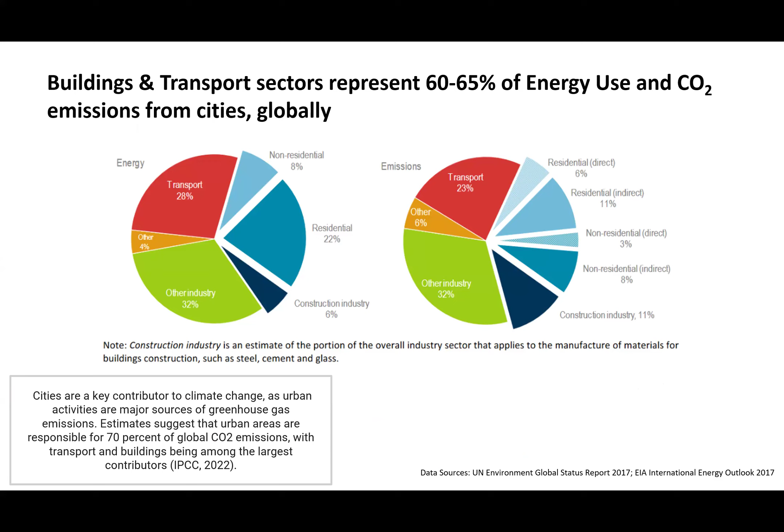So what I want to talk about today is mainly related to the buildings and transport sector, because those are the biggest energy and carbon emission consumers worldwide. It changes from city to city, but mostly it's about one third transport related, one third buildings, and the rest is more industrial use.

So if we talk about, still a bit of an echo, I think. Yes, so I think you can continue as usual. You probably need to switch your speakers off. Anyway, so if you look at roadmaps towards zero emission, away from the screen and speak like just the slides. Yeah, but I'm fine like this. I think it's more, I mean, we can't have two speakers. There's just an echo of the voice. Yeah, but if you switch in your audio settings, if you reduce your speaker to 0, then there won't be any echo.

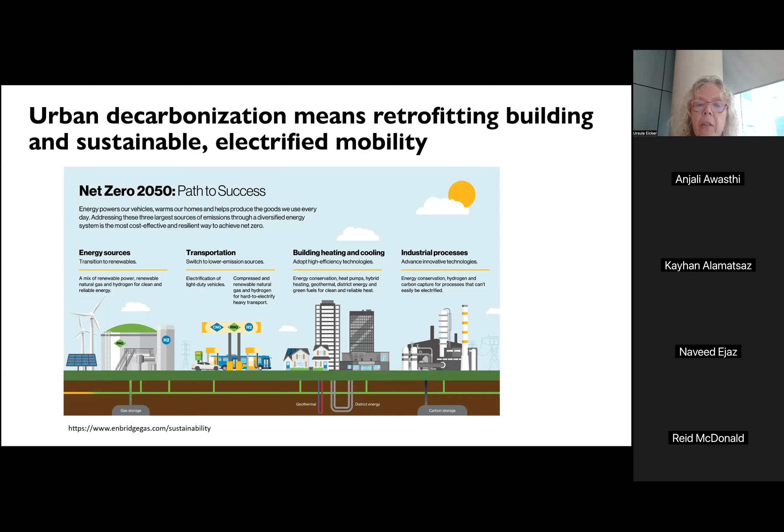Okay, so we need to look at renewables integration and then, of course, decarbonizing mobility and buildings. So I have quite a lot of slides, so I'll move quickly through some of them, but you can ask questions and come back to any of those.

Basically, if you look at buildings and transportation, in the building sector, if you talk about decarbonization, first of all you need to reduce the demand. That's always the best strategy, and then electrify. Electrifying buildings means mainly going from gas to heat pumps. This is an example on the left side.

By all these measures, and also changing lights, they managed to reduce the demand so much that the new chillers and heat pumps they put in were so much smaller that they saved a lot of money on equipment size, since they needed to replace the chillers anyway. So in the end, the project was financially viable and even positive. It can be done even on really historic old buildings.

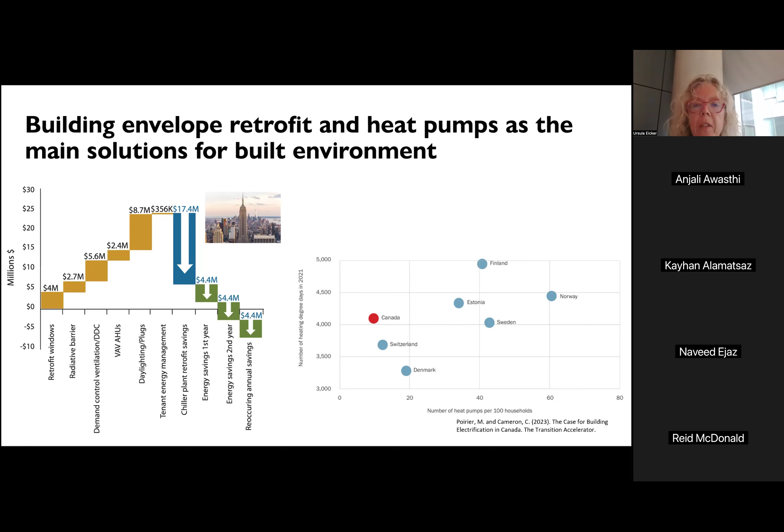Okay, so in transport, what we are working on is mainly the urban planning side - how do you make cities more walkable, more compact, with more amenities. This is the typical 15-minute city concept you might have heard about, very popular in Paris. So that's one side, not really technical.

It's again about reducing demand - I think that's one of the main messages. It's always a good idea to first bring down demand rather than just changing from gas cars to electric cars, which requires a lot of resources. So reduce demand, then increase active transit - bikes, walking, and so on. The only thing we work on in the mobility sector is then how to electrify more shared vehicles. I'll show you some results from a charging station location planning tool for electric buses.

And of course, there are car sharing models, and we looked also at bike sharing. I'll come back to that later.

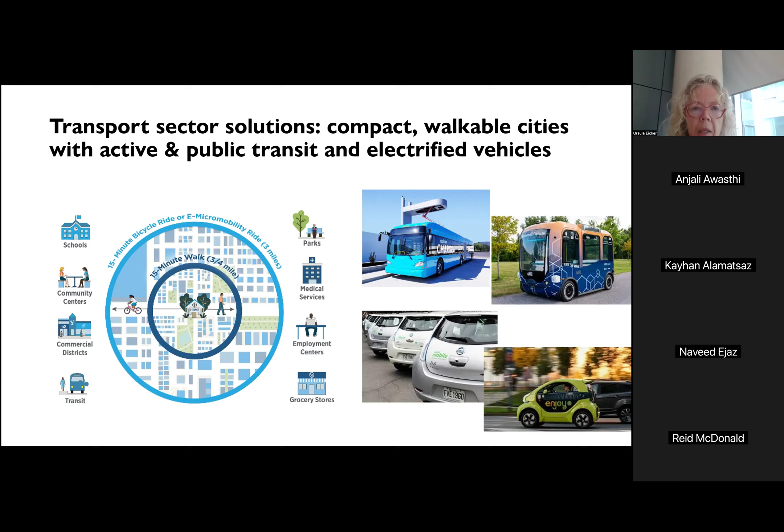So my team is basically trying to build these urban digital models to see how we can get to zero emission scenarios. One thing is to model the scenarios, the other is how do you get people excited about it and wanting to change something. So we have these web interfaces - I'll show you some examples of this.

We built a full model of Montreal. But we also have people working on game engines, basically importing the same kind of data into a game engine where you can have much more interactive scenarios, have people change things and see how they like the space, or have them leave comments and give feedback - for example, on a project here with ARTM on designing a new mobility hub in the Bonaventure area.

So that's basically what we try to do. And if you try to model an entire city, it's pretty complicated because you have a lot of domains - transport and buildings, but also livability, greenery, water management, food supply, and so on. So we try to connect all these different domains and have some calculation engines in the middle, and the results of these engines deliver output to web interfaces, gaming engines, apps, and so on.

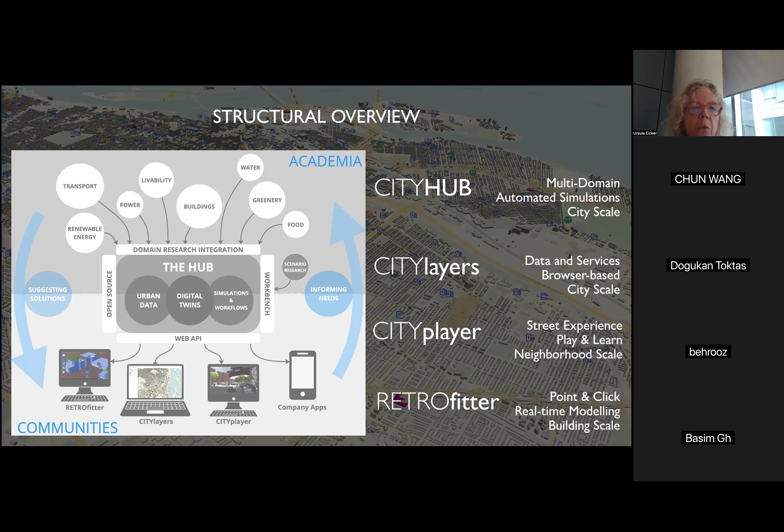I think the main thing is to really have a good software architecture so that many people, students, researchers, can add to it. That's one of my suggestions for you too. I know quite a few of you are working on transportation - if you have interesting models, it's a real pity that everybody develops super nice models but then you leave and it's lost. So we have a few software engineers who try to integrate different tools, mainly from grad students, so we can expand more and more the functionalities. For that to work, you need a really good structure for managing your data.

So we basically said, okay, we want to run simulations - energy simulations, agent-based traffic simulations - and we know exactly what these simulation tools need. That data we structured nicely in a central data model, because you will never get the input data harmonized. Every city does it a different way - some have Excel files, some have databases.

There will never be a standard, so you need to have some importers, but what you can standardize is the central data model, because from there on, once we've got the data in, it's always going to be the same process - we feed the simulation models and manage the results. And I think that was the idea from the beginning.

So we built, that was actually a postdoc who started with that, a 3D city model of Montreal using only open data. And it's not just data visualization - this is actually an agent-based model for transportation. So the interface shows real data, but also modeling results.

He started to just collect whatever data is publicly available - there's a very nice tree inventory of all the public trees, no backyard trees, but public trees are all in there. So you can make use of all this data in different layers - that's why we call it city layers - to then develop services. I'll show you a bit what I mean by services.

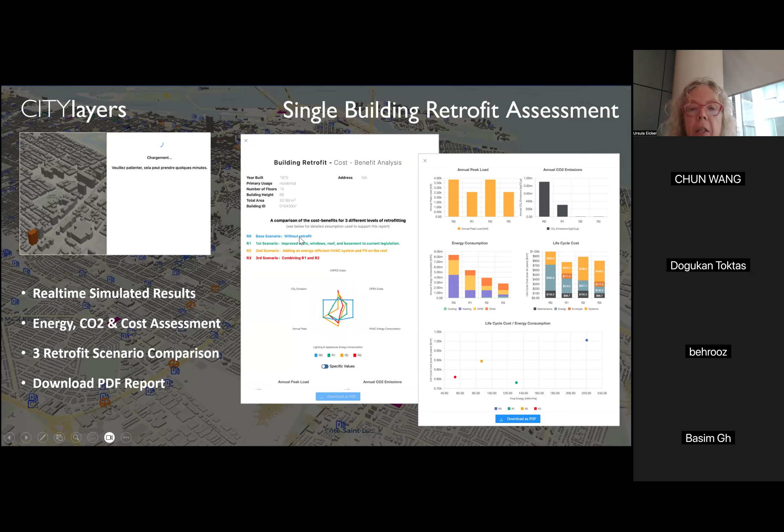Let me show you what that means. So you basically click on a building, and then you automatically get a sort of PDF that you can download on the retrofit scenarios of that building. So how much, what the base case is, based on usage and year of construction, what would happen if you insulate the envelope—walls, windows, roofs—what would happen if you swap the energy system from gas to electric heat pumps and some photovoltaics, and the combination. So that's what you get.

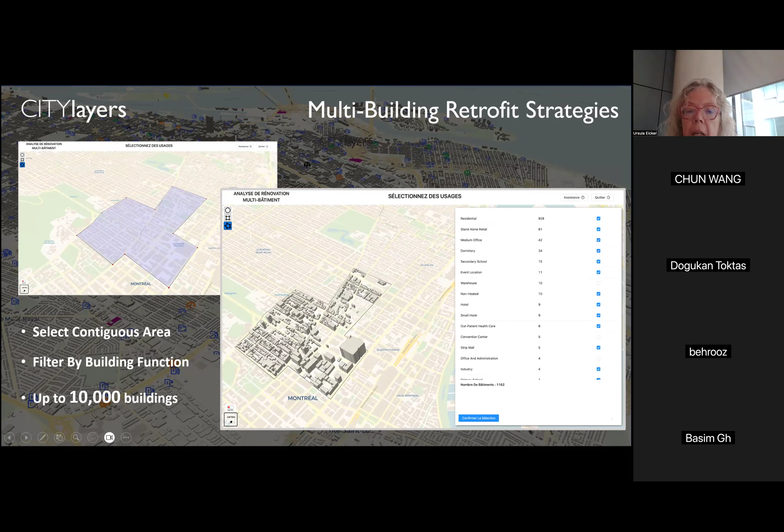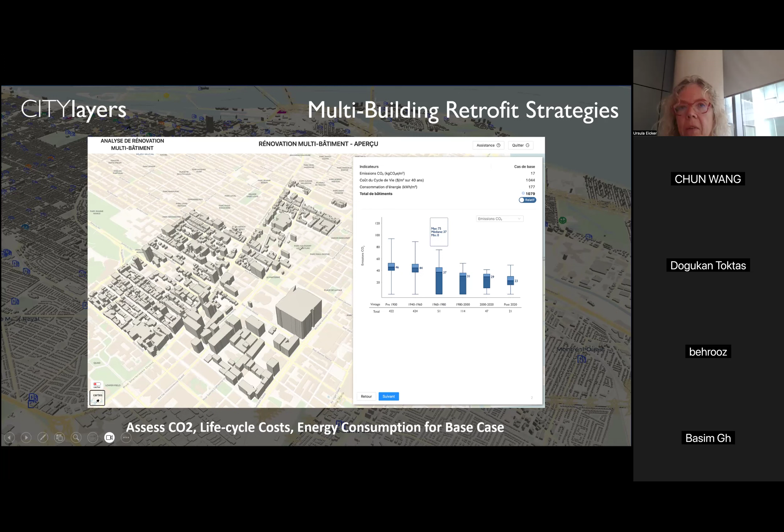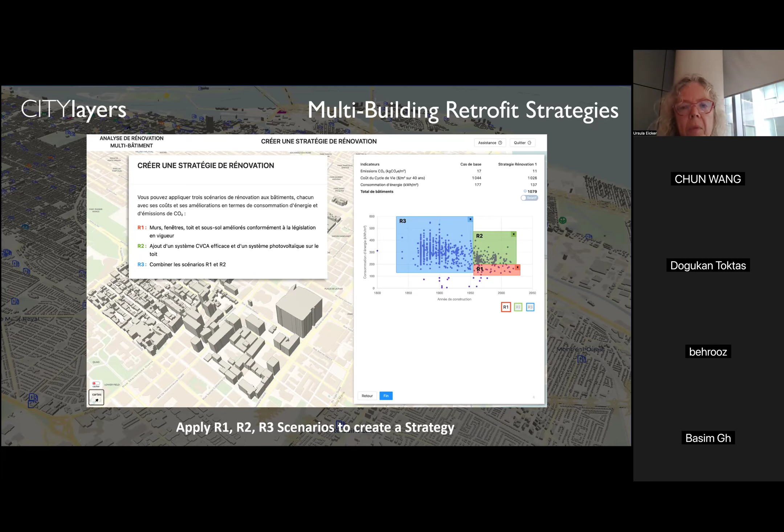So that is actually, and then we said, okay, now we can again do some retrofit scenarios, and the individual points are now individual buildings. And then you can say maybe for the oldest building I do the envelope, for the newer ones maybe change the energy system, or both—up to you. So these interfaces allow you to come up with scenarios, and then calculate, of course, cost—life cycle cost.

The status quo—the good news is even if you do everything, you retrofit the envelope, you put a new heat pump system, you put some solar on the roof, the life cycle costs are lower for basically every building than what it is now.

I think one of the problems is that companies today especially don't really look at life cycle costs. They want return on investment in a few years. They say, well, over 40 years it pays back—no. So there's a lot of convincing to be done to change mentality more towards life cycle costing, because then it's worthwhile.

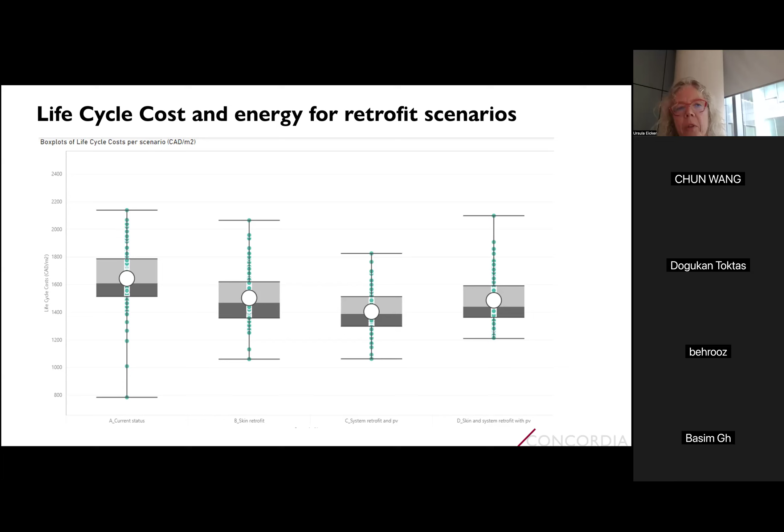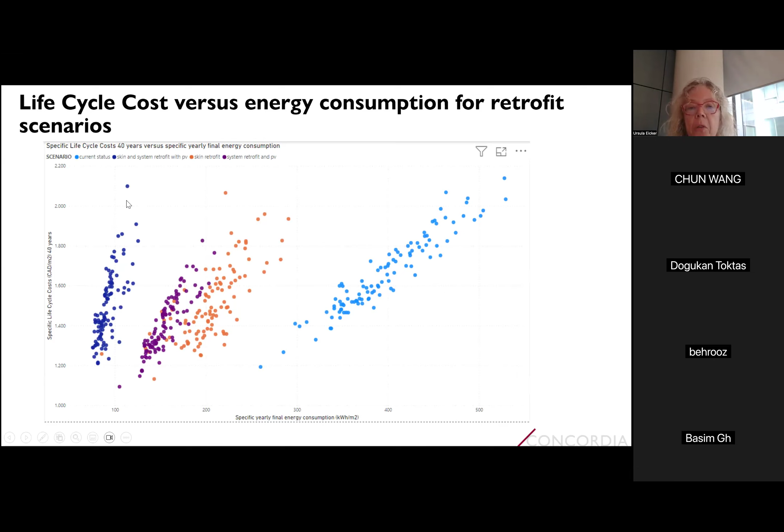So here you see again the status quo, all the buildings with their high energy consumption, and then you do these retrofit scenarios and you bring down the energy consumption, but also the costs are for most buildings lower than before. So that's what we can do now.

Just a few words on what that means if you want to create a city model, because now we started with Montreal, but now we've got a project with Quebec City—they want the same data. It's pretty useful for city planners; they all have sort of climate action plans, but so far they've had basically no way of calculating in detail how to do this. And so one of the main problems is the data.

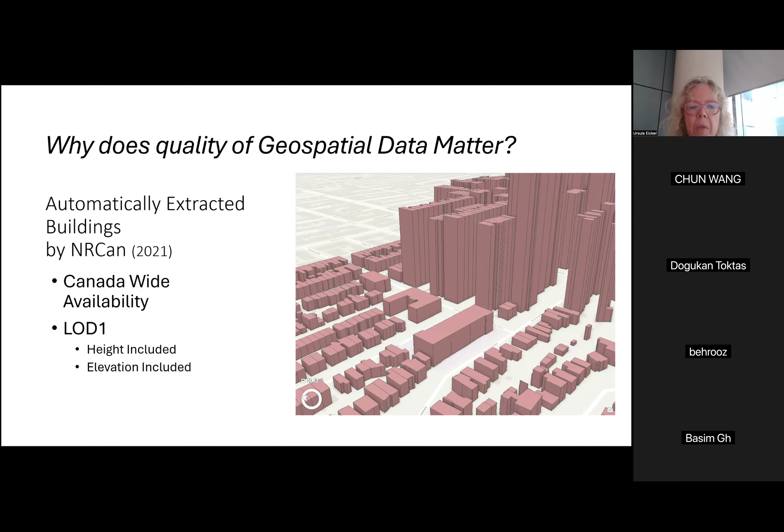NRCan, Natural Resources Canada, does provide geometry data for all cities in Canada, but you really need to spend some time looking at the data, because here in Montreal we found some areas for some reason had these incredible high building heights, which were of course wrong. So there's a lot of data cleaning involved, and we have some people now trying to automate these processes, because the data is basically derived from LiDAR flights—you fly over the city, you measure the height, but then basically the LiDAR is just a point cloud.

So this here is considered like one single building, but of course it's a street, it's for sure multiple buildings. So you need to overlay that information with, for example, cadastre information or tax office data, where you see what are actually the individual buildings. So you cut it up in pieces, then you go back to the LiDAR data set and assign one height to every building. And you see it's, of course, a big difference. And the results for your energy models will be, of course, also very different.

We import this data. We generate these IDF, which is basically the file type for EnergyPlus, an energy simulation tool, open source tool developed in the US by the Department of Energy. And then we need to bring in all this information about the occupancy of buildings, constructions, and so on. And if we can, we had some projects on accessing other data sets like building permits, renovation permits. They're also very unstructured data, so there's a lot of work needed to harmonize that. Anyway, that's the whole workflow. We enrich the city with all these attributes, and then we run the energy simulation.

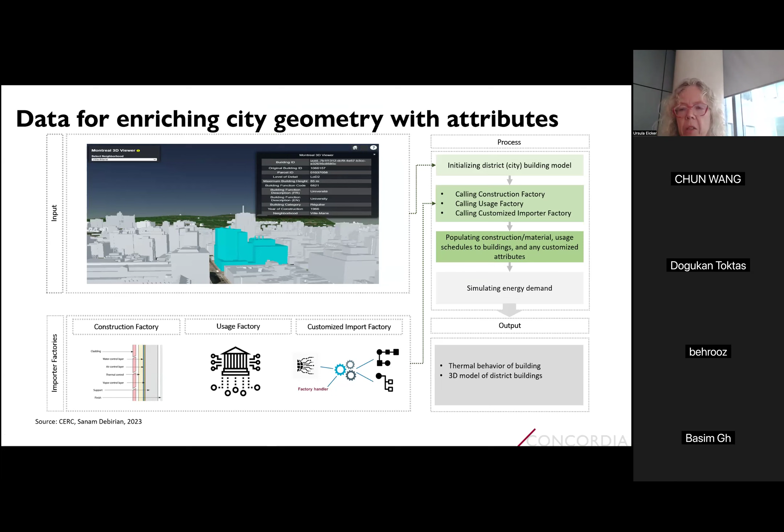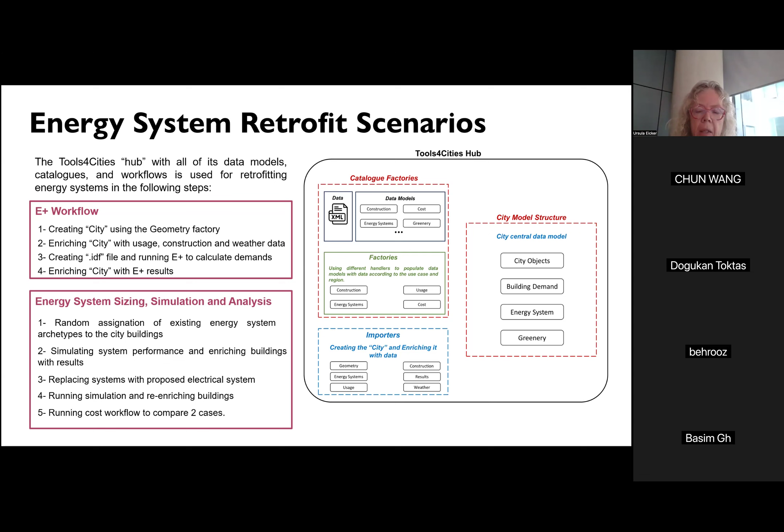So maybe to finish off the building part, once you have the envelope, you can calculate the demand, but you also don't know what is actually inside. There's no data set that tells you this building has a gas heating system. Of course, companies like Hydro-Québec or Énergir, they know, but they don't share the data. But we have statistics, and we know in a certain area of the city, 20%, for example, are gas heated. So what we did, we generated some energy models and then assigned to every building the heating system.

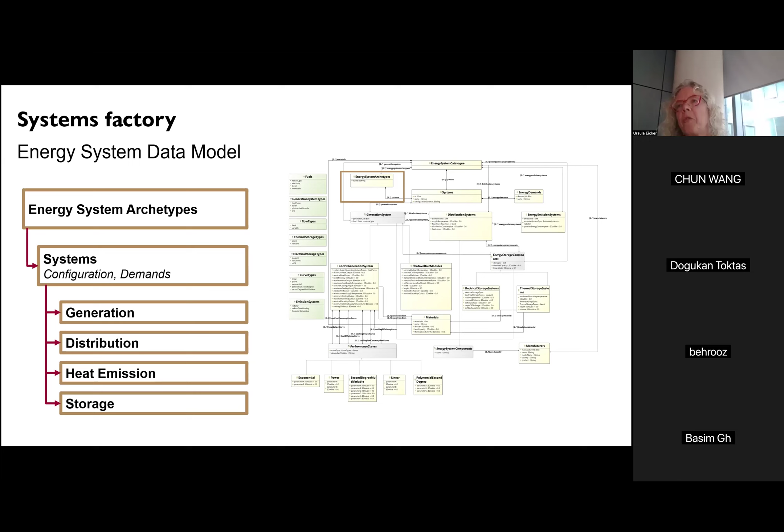And again, data modeling is pretty important because, as I said, once you know how to simulate anything, it could be a traffic flow or an energy system, you need to really structure the data well. For example, that an energy system consists of energy generation, you need to distribute it, you need to emit the heat in the building, maybe you have storage. So you really need to structure your data well. So this is basically our work to say what is a good classification of all these different components in an energy system. Then we bring in the data, feed the simulation model, and get the results. And I want to show you a bit.

So typically you could do that building by building, but there's a lot of talk now in Montreal on using district energy systems, because in a way it makes life easier if you have one central generation unit and you just distribute basically the heat, maybe also the cold. Maybe there's a new technology coming on, then you don't need to go back to every single owner, which is a pain. In every building, basically, you have just a heat exchanger, and that's it. Whatever happens in your energy generation can change. It doesn't affect the consumers.

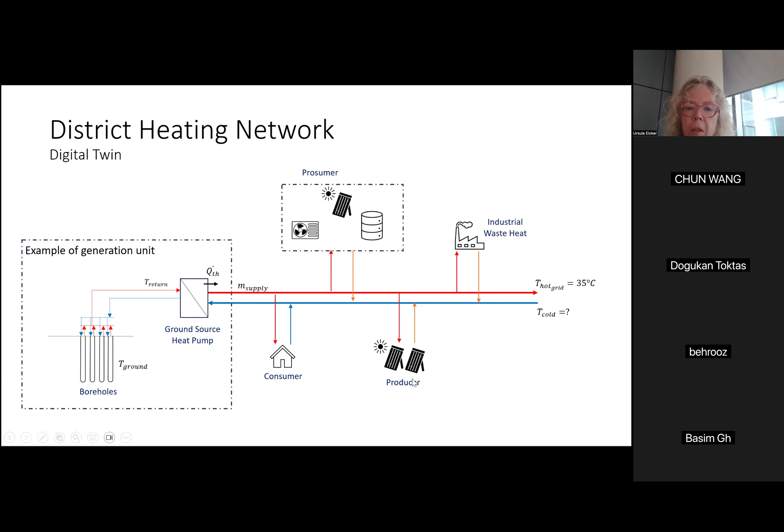So these networks are actually pretty interesting because you could also put some waste heat in. We have now a lot of data centers, lots of waste heat, and typically it just goes to the environment. Could be very nicely used to heat buildings. You could also put some solar or other energy sources into that district heating network. So we now spend some time saying, okay, how can we automatically generate models for district energy? So same thing, we know already what the energy demand is.

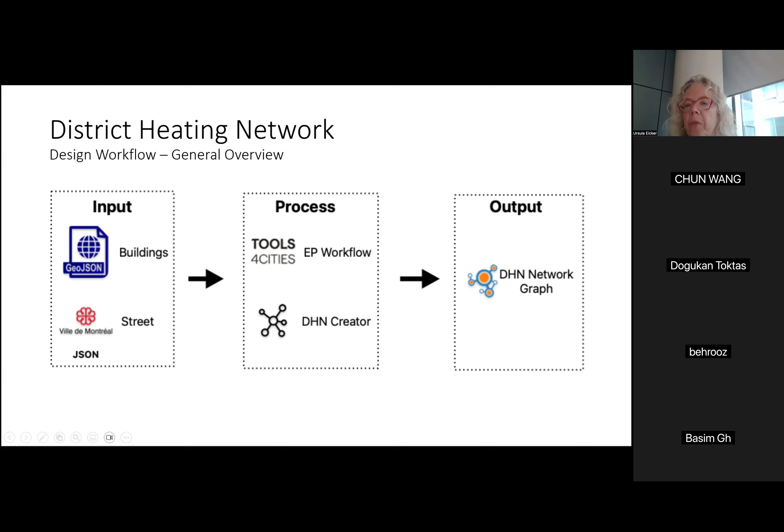Then we know the street layout. So any pipes, as you well know, because the streets are dug up all the time, any pipe will go through a street. So we know where the streets are going, and then based on the demand of the different buildings and the street layout, we could then automatically generate this graph, which is basically a district heating network. So maybe I don't go into all the details here, but it's an optimization problem. You need to find basically the shortest path to connect buildings through the street network to minimize cost, of course. Yeah.

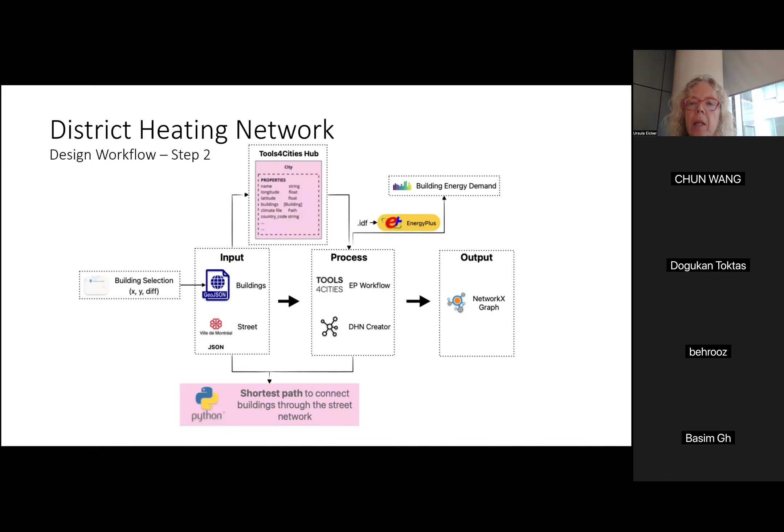So that's one thing. And the advantage is if you have lots of different buildings connected to one network, it's actually quite nice, because you might have heard that there's a lot of debate that Hydro-Quebec doesn't have enough peak power in winter. Because that's one of the main issues, that people heat their homes maybe at 6 o'clock in the morning, and then there's a huge peak and the network cannot carry it.

If you have a commercial building and residential buildings connected to a heat network, then this peak doesn't occur at the same time. So that makes it really much easier to generate this. So the district peak demand is typically much lower than the sum of all the individuals' demands. That's actually one big reason why district energy is interesting.

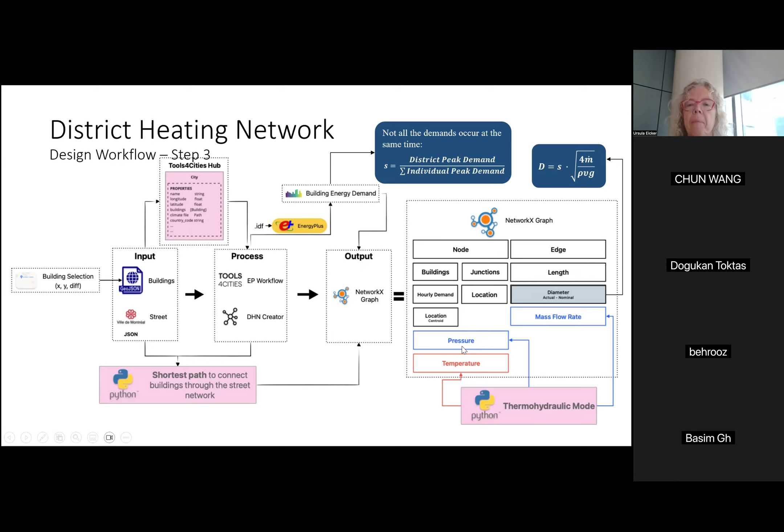And then, as I said, we try to minimize the piping lengths, and also the diameter, because you can imagine that the bigger the pipes, the more expensive. But on the other hand, you need to put all this heat through the pipes, so you need to minimize the pressure drop. So that's actually the optimization problem. So you need to construct the graph in the first place.

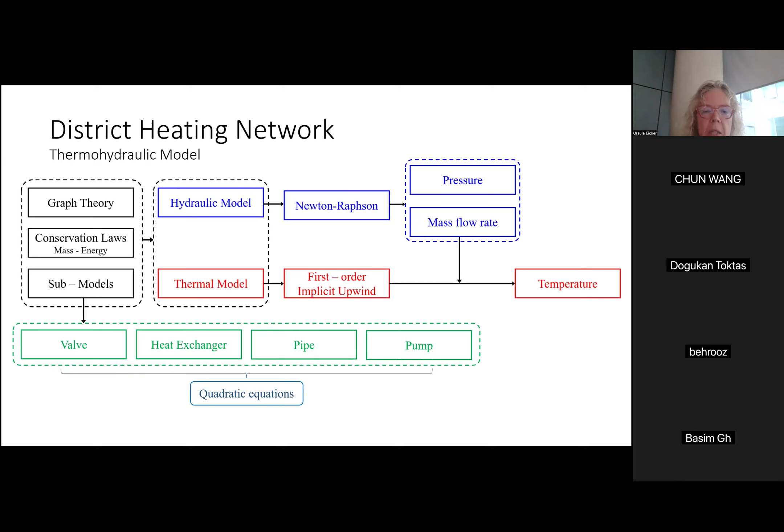Then you need to model the hydraulics. So there's basically water flowing through these pipes. And if you have water flowing through a pipe, you lose pressure, so you need pumping power. So the higher your pressure drop, the higher your pumping power. And you also want to minimize the heat losses, because if you have a central plant somewhere in the east of Montreal supplying buildings in the city center, you have already 20 kilometers of distance, you will lose heat. So that's a pretty complex use case.

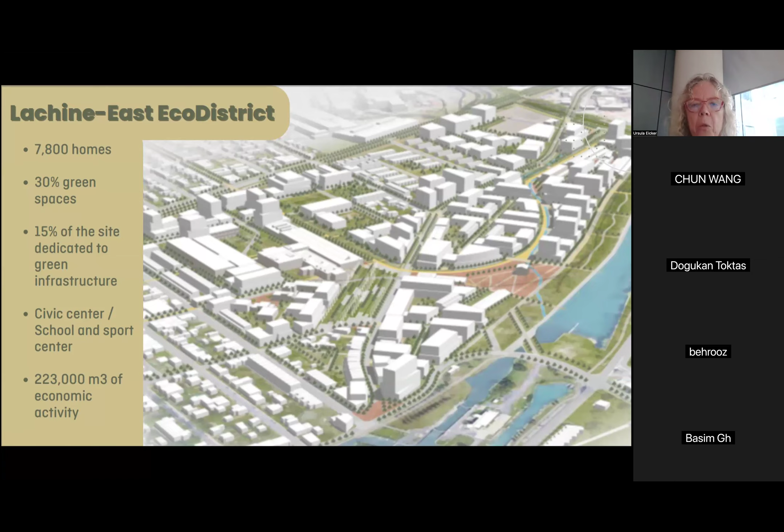And so one PhD student has developed these models, and now we're using them for district development here in Lachine East. You might know it. It's the end of the Lachine Canal, where the Lachine Canal goes into the St. Lawrence River. It's a big district to be built. Right now it's a brownfield, basically nothing left, a few old industrial buildings. And there are private promoters wanting to build on that area.

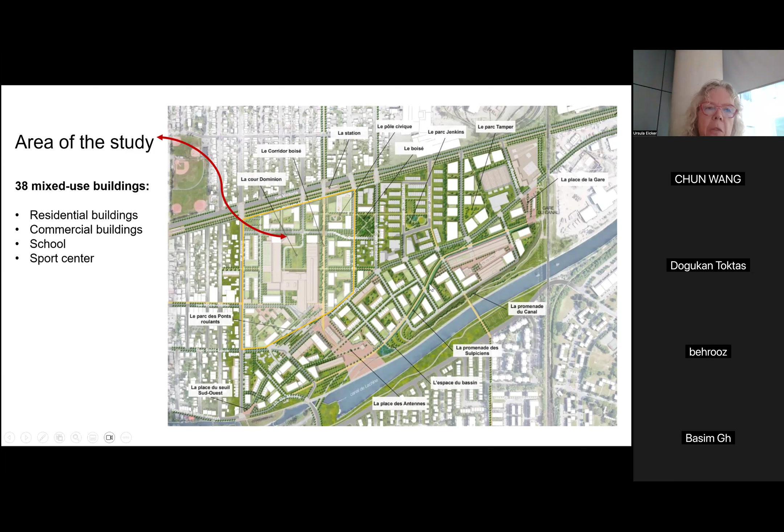But because nobody has experience here with district energy, they're all very afraid how much it will cost. For them, it's much easier just to put baseboard heaters. Cost nothing, and they don't care that it uses a lot of electricity. So basically what we're trying to do is we looked at the area, we have the urban master plan, and then we sort of calculate these energy scenarios.

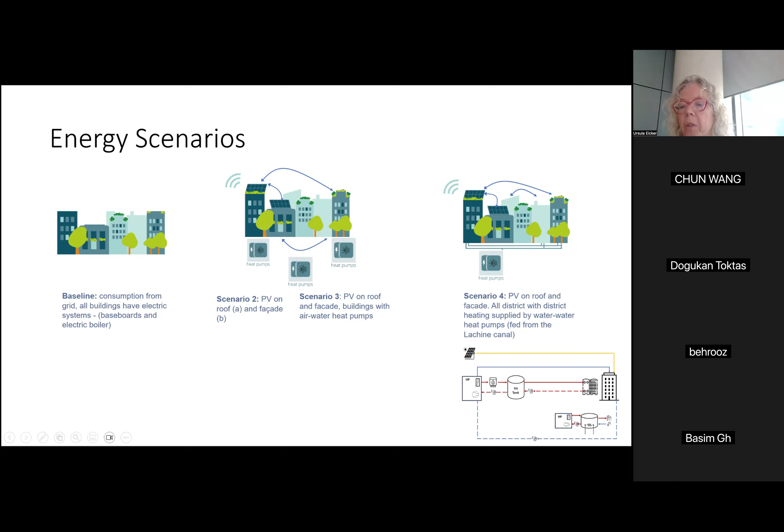Either this is the standard case, so everybody takes from the grid, everything is heated with electric boilers or baseboards, which is quite clearly a waste. And then we put some solar on the roofs, and then we modeled the entire district energy system for heating and for domestic hot water. So I'll just show you, and then I go to the transportation cases, because they might be of more interest.

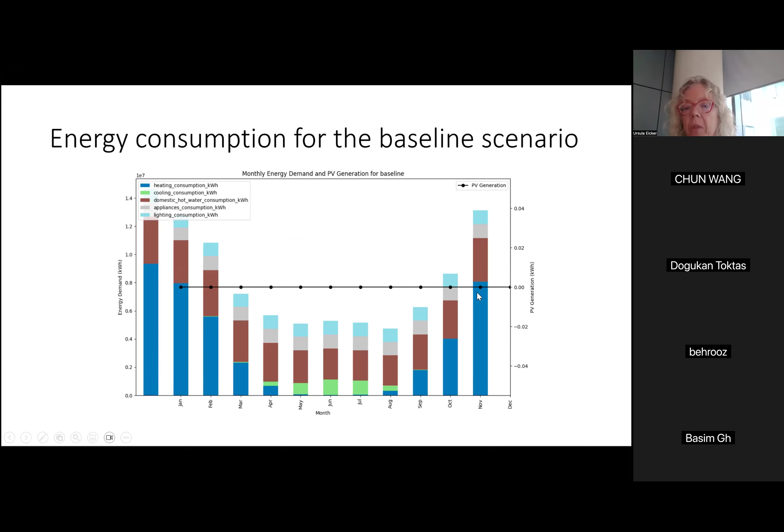So what you do, here we have the 12 months of the year, and we basically model heating, cooling, domestic hot water, and the electric appliances. As usual, in winter, you have much higher heating demand. And because this is the base case, heating is very high because it's direct electric heating. So what happens now if we move to the solar scenario? So we put solar on the roof and facade. On the roof, you get the most energy, and we put some on the facade where there's no shading.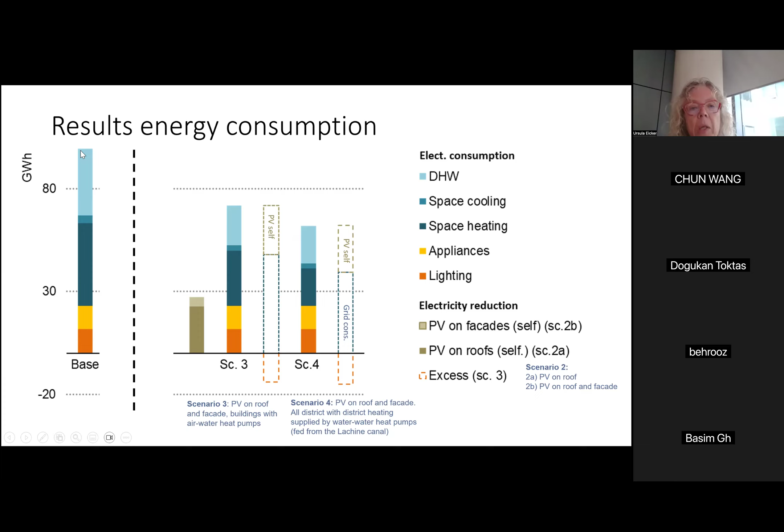So you can generate part of that electricity demand by solar energy. And compared to the base case here, where we have quite a lot of heating, you reduce your heating because now we use heat pumps. So that already shows you how you can reduce your energy consumption in the area. And then this question of peak loads, you can reduce the current situation by some solar by about 12%. And then if you put the heat pumps in, you can reduce the peaks by 50%, which is good.

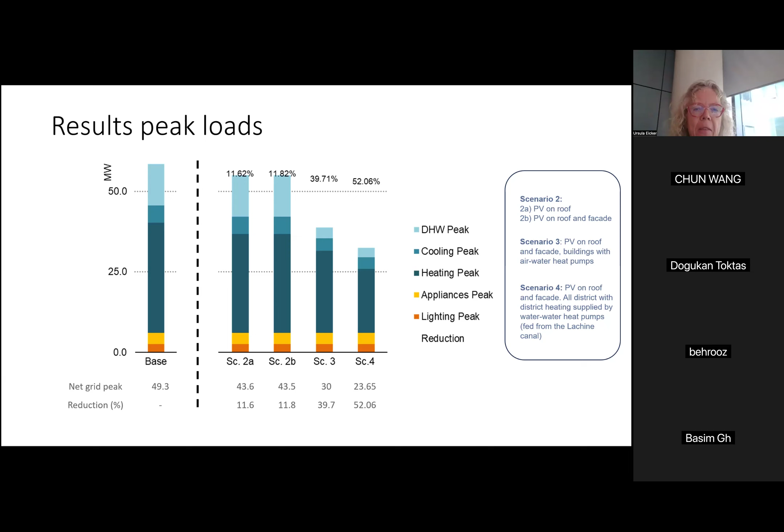I mean, that's really significant, because if you don't reduce the peaks, you would need to build new transformer stations. It's also costing money. The question is, it's always a different pocket. Hydro pays for the transformers, but the real estate people pay for the heat pumps. So that's a challenge of what we need to do.

Okay, now the district energy situation. So we studied different network configurations and temperature levels, and basically what the private sector wants to know is what is the best configuration, the minimum configuration. So we basically looked at using different sources. For example, here in that section, maybe a heat pump feeding from the canal water.

Here's some industrial waste heat. So there's various options of heat sources. We also looked at geothermal energy, and then, of course, connecting everything with the district network. So this is the entire project.

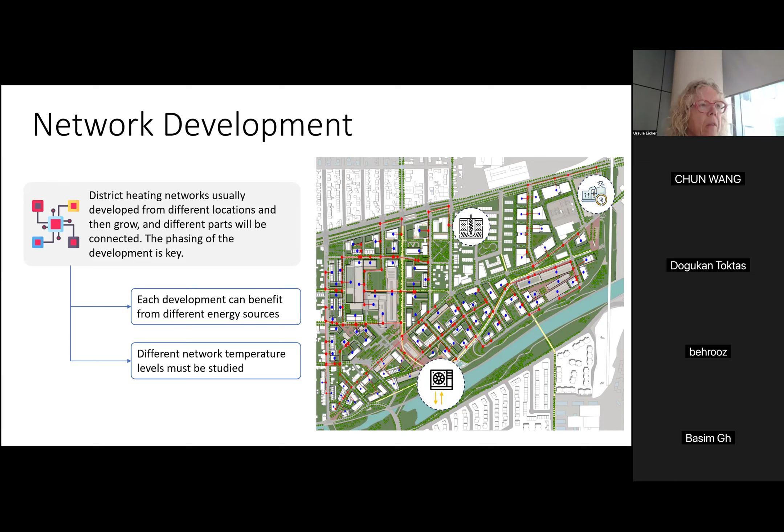Everything is automated. So there's nobody sitting there drawing pipes by hand, what a typical engineering office would still do today, because they don't have these algorithms of automating the whole model. But now we had the problem, this district is not going to be built tomorrow. I mean, you start somewhere, maybe in 10 years, the next sector will develop.

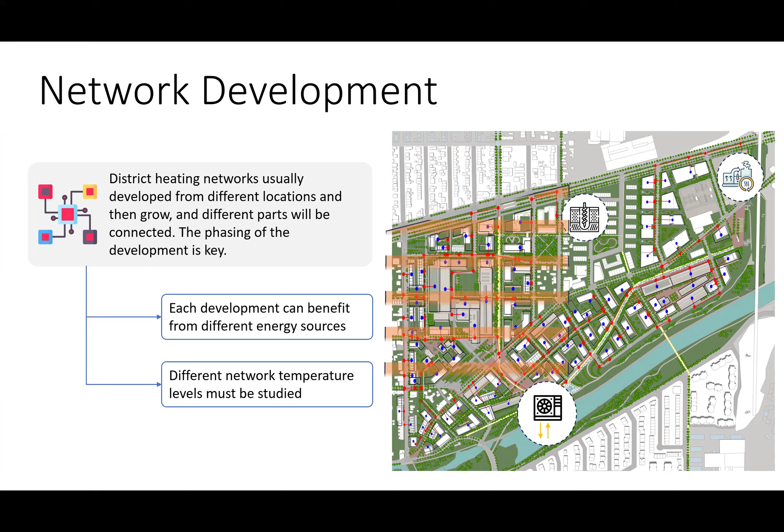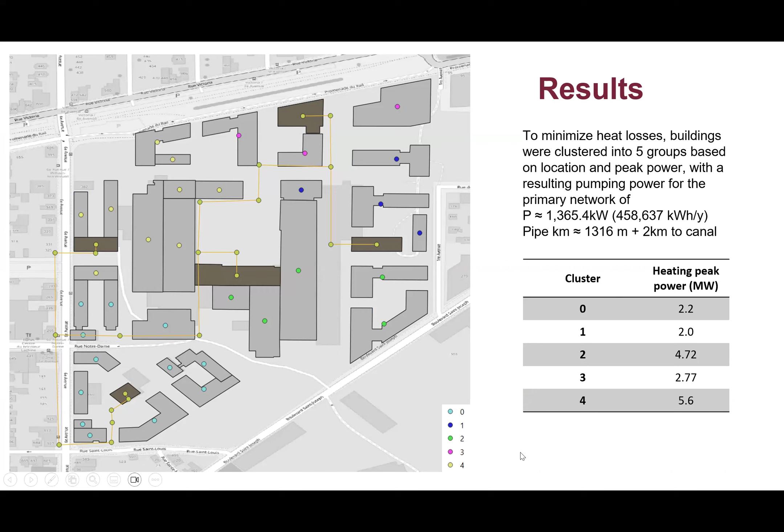So to build an entire network, it will cost, I don't know, 80 to 100 million or so, is probably not possible. So the next thing we did, what happens if we develop, I mean, this area will develop in phases. So we did basically the first phase, looked again at the minimum network configuration and to minimize heat losses. Also, we clustered the buildings into 5 different sectors with their own heat transfer station.

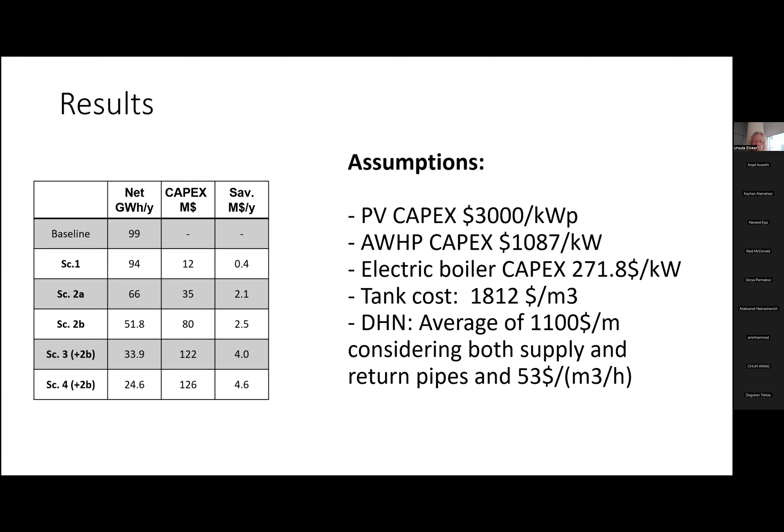And so that's basically the result of the optimization, how you would get to these scenarios that can reduce consumption and peak power by 50%. But you see already, we're talking here about costs of over $100 million and return savings, energy savings, because now we have less consumption, of maybe 5 million. So you can already see, simple payback, very, very long. So you really need to look more in detail of how can such a project become financially viable.

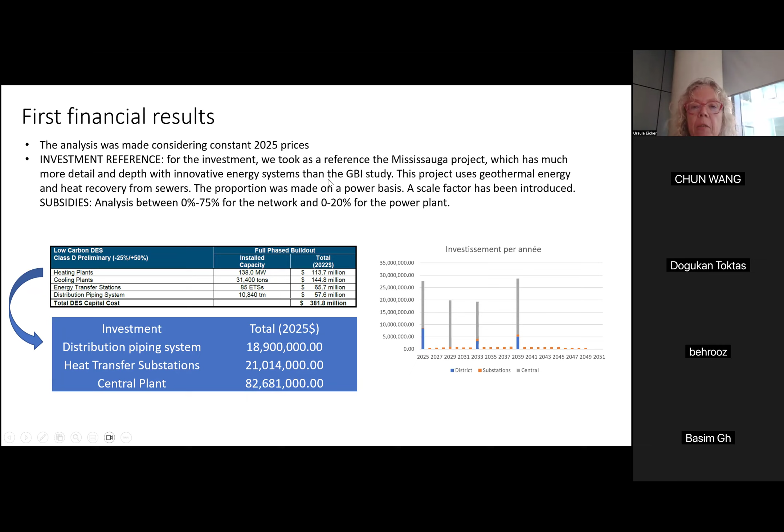And so it's pretty complicated because there are subsidy programs, but they're limited. There's subsidy programs for the piping systems, some for the central plant, which is the most expensive part. So we took some data from a built project here with lots of financial information. And then we basically did some financing scenarios. And I don't want to go into the details, it would take too much time. But basically,

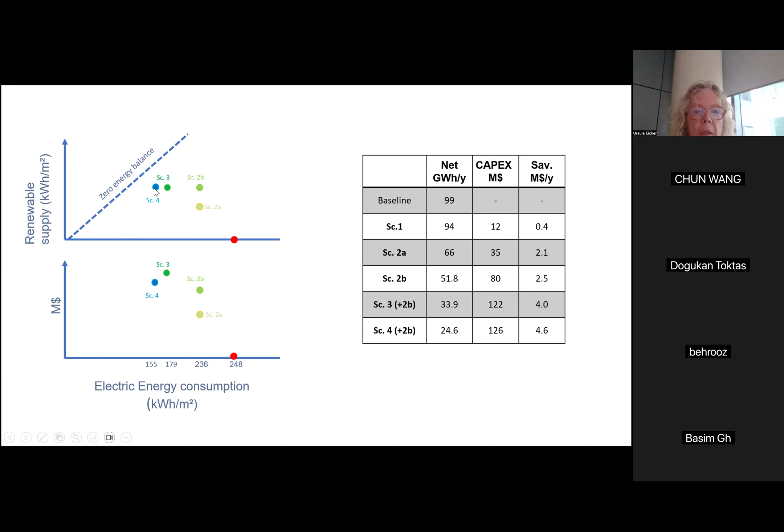All right, okay, that was the building part. Now I want to spend a few minutes on the transportation scenario. So we have about, I would say, 10 grad students who work on mobility. And as I said, we're not transportation engineers. I'm not a transportation engineer. I come from building science, but because transport has such a high emission part, it's absolutely essential to look at it.

And because we also look at design and urban planning, as I said, that has an impact on the transportation demand. I'll show you a bit what we did on electrification and charging station location planning and bike sharing demand predictions. And then, of course, in our City Layers tool, we want to bring everything into a sort of spatially very disaggregated emission map. So that's basically what we're just working on.

The same idea, you select an area. We have generated a synthetic population based on the origin-destination matrices. And we know the mode choices in an area, and then the user can say, well, what happens if people take more public transit or buy more EVs or use more bicycles? What does it do to the emission demand? That's one use case we're currently working on.

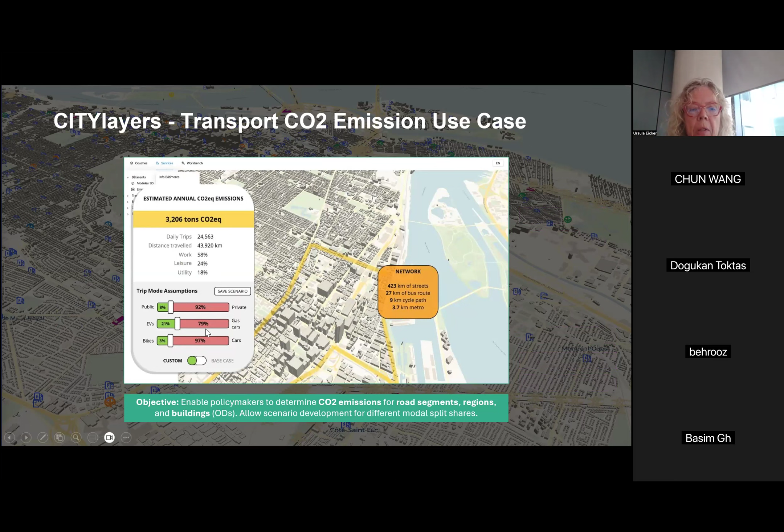We're pretty much finished with the CO2 emission use case, but it's not live yet. And the citizen engagement part, this is a new mobility hub near Place Bonaventure that ARTM is planning. And so this really goes into the detail.

They really want to know, what difference does the design of a bus shelter make? Do people like one option better than the other? Or what if you put big displays everywhere? So there's several points where users can actually change things and also leave comments. We really want to try whether that could become a much better feedback tool for the Office of Public Consultation or the mobility agencies to comment on acceptability.

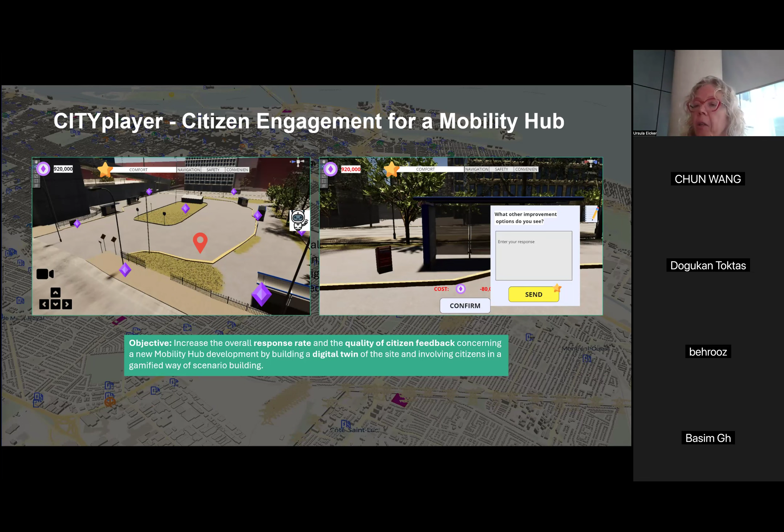Anjali, what we just talked about before, it would be nice to create some use cases for acceptability. We want to develop a proposal, maybe another possibility for collaboration, for Voltage, which is on electrification of society, and of course transportation will play a big role. So again, we really want to expand these kinds of tools, developing a kind of multi-stakeholder platform to plan electrification strategies.

And so we're collaborating with a colleague from École Polytechnique who works on agent-based models, and colleagues from computer science here at Concordia, but there's of course possibilities for more people to come into these kinds of projects. In the end, we want to see what do the users want? How does the charging infrastructure need to change? What does it do to the electrical grid as it is? Because all these heat pumps and electric mobility will add to the electric power demand, and we need to see whether that's possible in the current grid situation.

Okay, so this is all in the future. One of my PhD students has been working on deep learning algorithms, and he did a quite interesting project on the Bixis, basically seeing how bike sharing works today, because you always want a situation where the number of check-ins and check-outs at a certain station is pretty balanced, because otherwise you see all these lorries driving around shifting Bixis from one place to the other, which is not very ecological, expensive, not very good.

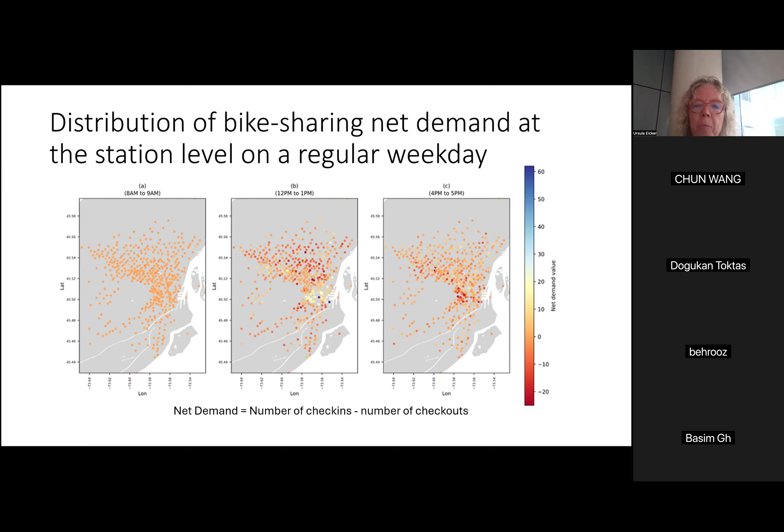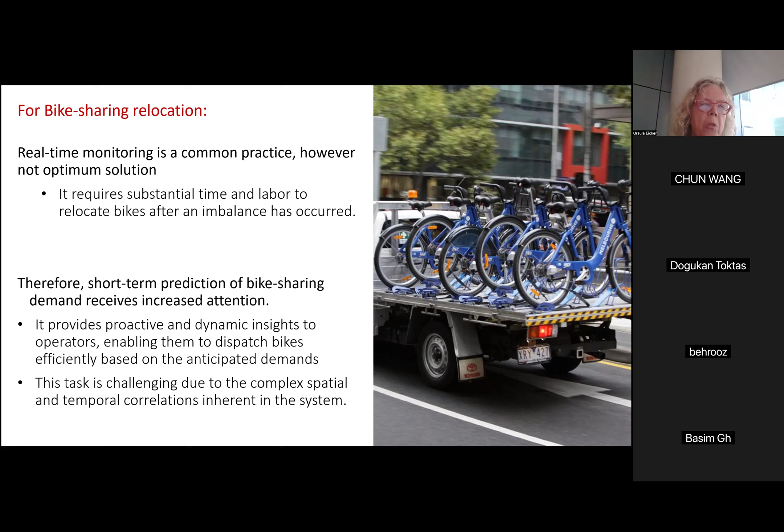You could do some real-time monitoring, but you want some kind of prediction of what happens in the next couple of hours to maybe give incentives to the users, like park your Bixi there, we give you $2, much cheaper than running a lorry. So the goal of the study was to develop a model for short-term prediction of bike sharing demand. The interesting bit is it's a spatio-temporal problem, because you have all these different stations, you know how they're used, that's what you saw on the first map, and there's a correlation of where people pick bikes up and where they drop them, and that develops over time.

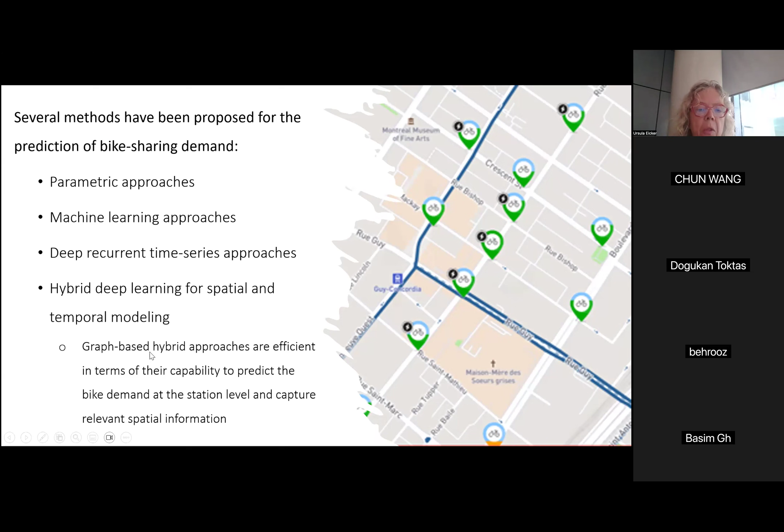There are various methods, and what Cheyenne looked at is this deep learning method for the spatial and temporal correlations between pickup and drop-off. So it's a graph-based approach. He's nearly finished his thesis, so there are some papers published. I don't have time to go into the details, but it's basically a novel graph-based machine learning approach to predict these drop-offs. And of course you need to check how your model performs. The root mean square error and absolute error are better than the other methods typically used so far, so it seems to be working well.

And then you can look at the ground truth and predicted pickups and drop-offs to verify that the model works well. So I think it's an interesting piece of work, making use of new deep learning methods. And now we need to see whether the Bixi company would be interested to use it.

Okay, and the final use case is on electrification of buses. That's also a student quite far advanced in his PhD. Kang worked on looking at what would change if you move from the current diesel buses to electric buses. Where would you place charging stations, and what would it mean for the timetable and scheduling? Because some of these electric buses have very limited range.

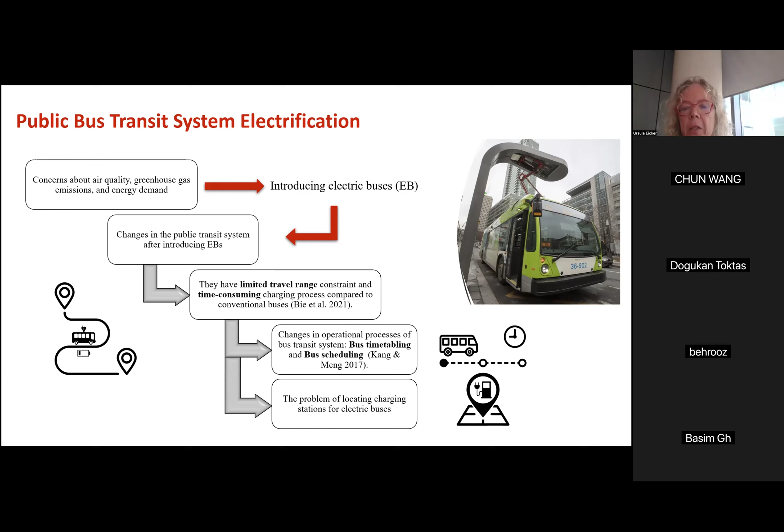You can get high range, very costly, but some have only, I don't know, 37 kilometers of range. So they wouldn't even last a day, and you would need to also allocate time to the charging. And that, of course, has an impact on the entire scheduling of the buses. So again, it's quite a complex optimization problem.

I mean, you have predetermined routes, that makes it a bit easier, but you basically need to minimize. The optimization problem is: what is the minimum number of buses you would need to cover all the trips? So we don't look at new timetables. The timetables basically reflect the current demand.

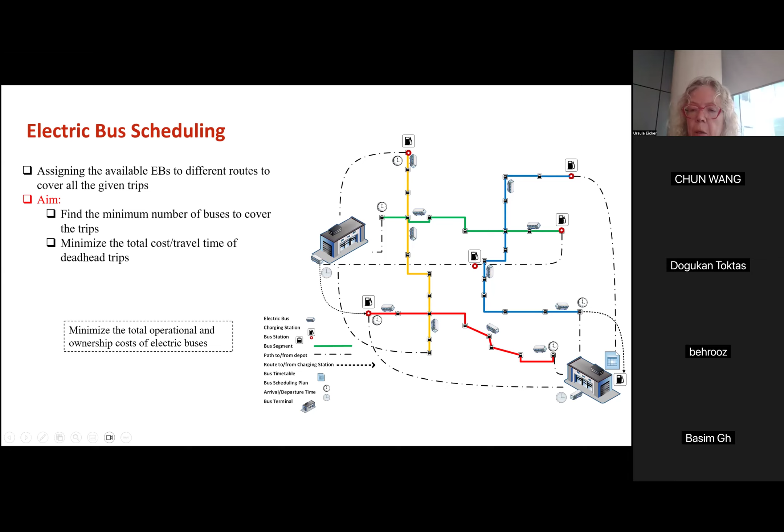You could also probably work on how this demand will change over time, but this is something we take as an input. With the given demand, you then optimize the number of buses to cover the trips and minimize the total cost and travel time of the deadhead trips from the depot to the beginning of the line or in between lines.

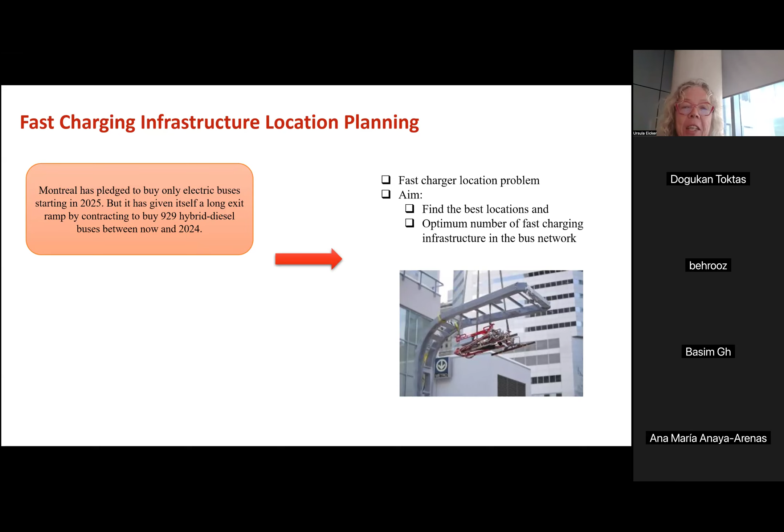So that's the goal. The city, like many cities, has pledged to buy only electric buses in 2025. Because they gave themselves this deadline, they went ahead and bought quite a lot of hybrid buses now to avoid having to buy pretty expensive buses. So we will be stuck with a hybrid situation for quite a while.

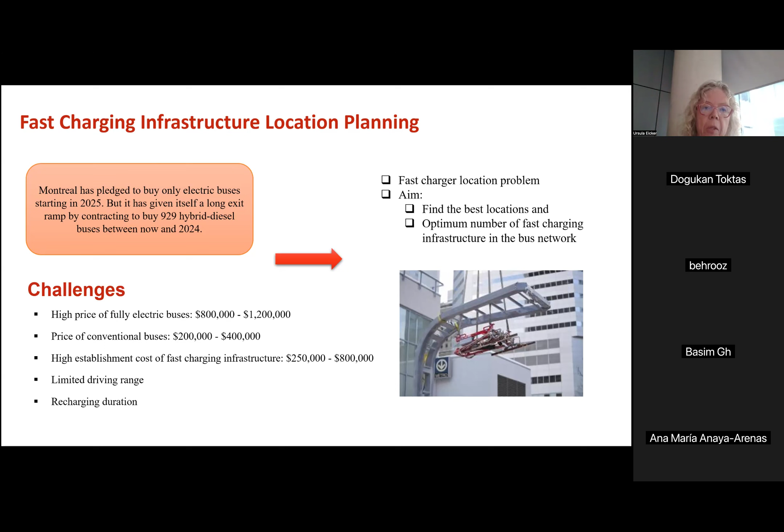And if you look at the prices, you see why that's an issue. It's basically 3 to 4 times as expensive as the conventional buses. And the charging infrastructure is also expensive. So you really would want to minimize the number of both charging stations and the buses themselves. So that's what Kayan basically did.

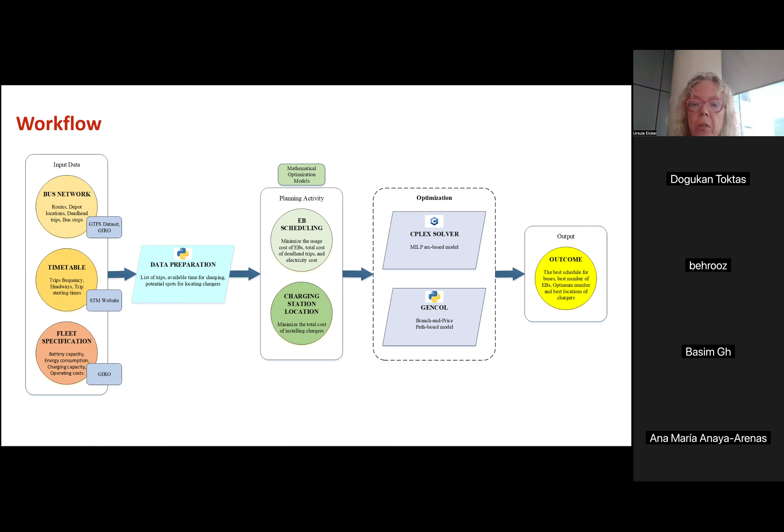Again, you need a lot of input data: the routes, the bus network, the timetable, and the type of fleet from different manufacturers. Then he developed mathematical optimization for the scheduling and the location of the charging stations. In the end, you get the best schedule for buses and best locations of the chargers. He worked on 2 different optimization model types, an arc-based and a path-based model.

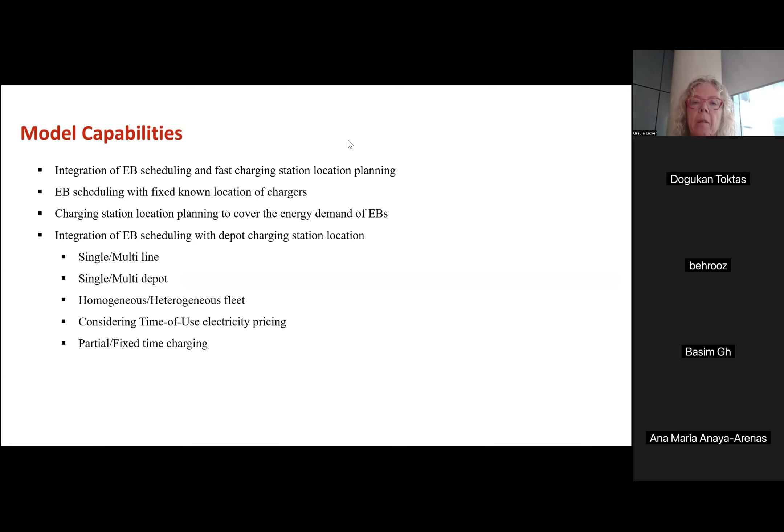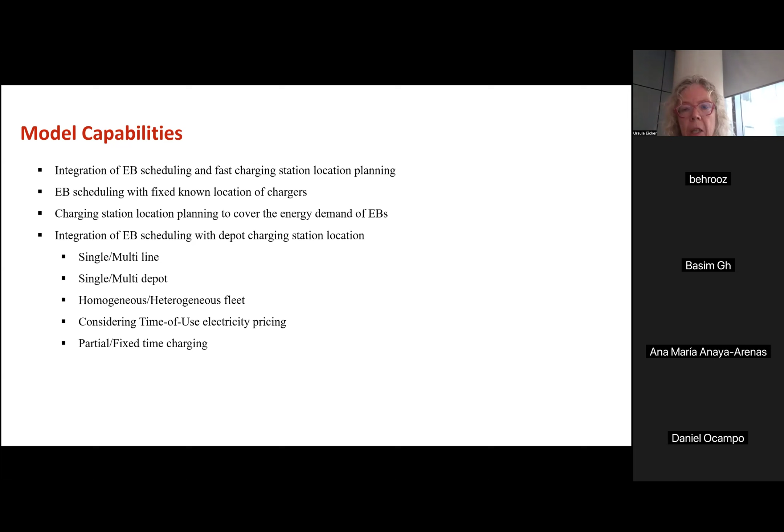So that's what the model can do. It works. It can be applied now to different situations in the city. Kayan is already working with Giro, the software company who develops these optimization models, and we'll see how it can be used for real planning.

Okay, that's it from my side. What I wanted to show is what these digital tools can do for different stakeholders. Myself, I've worked a lot with the real estate sector and the city on the building sector, for these transformation roadmaps to zero emission. But once you've got the models, you can also optimize the real-time energy management.

We also looked at mobility topics around electrification and charging station location, and sharing models just now for bikes; it would also be interesting to do the same thing for cars. To bring that all together, I think the key is to have a growing open source software where people can connect and bring in new models that are being developed in the different teams.

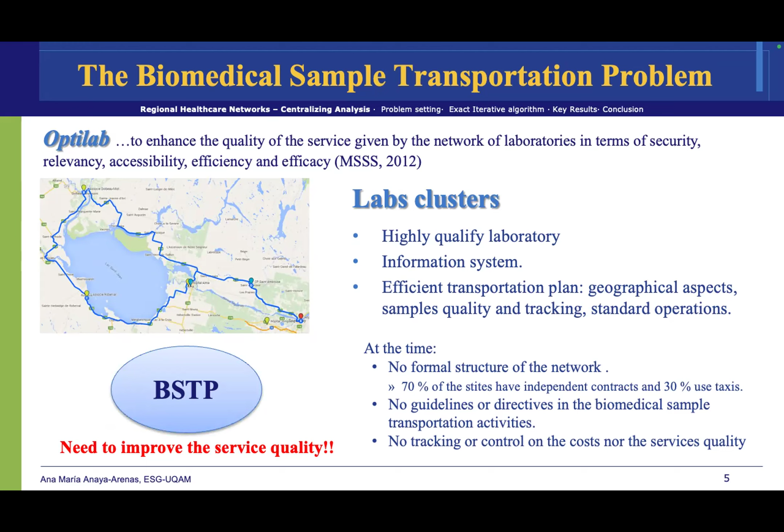We call it the biomedical sample transportation problem, because when we look at this - and this is a picture of Saguenay–Lac-Saint-Jean, and the type of lake you have over there - you think of this and say, okay, this is kind of known how to do, this is routing, there's so many things on VRP. This is kind of known how to do, but it's not really just VRP.

There is a lot of specific things, and I will then share a little bit more detail of what the problem is in terms of management, but also in terms of transportation and how we have to do it.

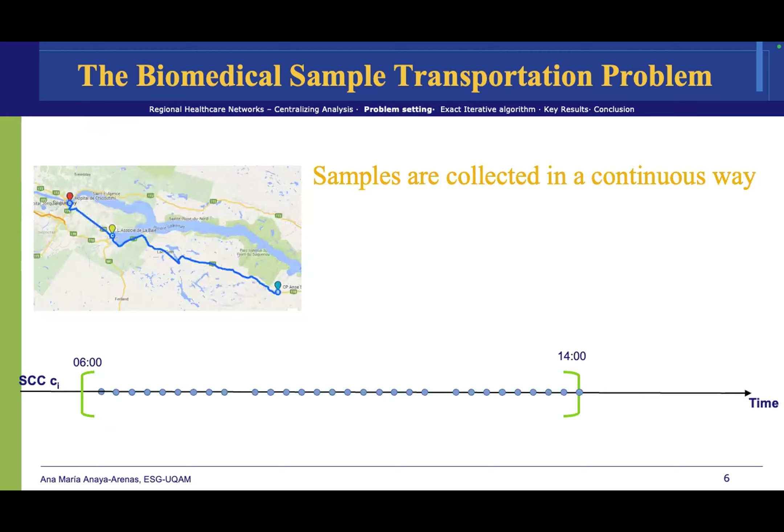Imagine that you have this one single SCC, or sample collection center - one single local clinic, elderly center, wherever it is that you take samples. You can imagine that the process of sampling is continuous at that time. So every time in my graphic here is one sample, one patient that you draw blood from, or one sample that you take, and you do this for a period. Let's say this one runs from 6 a.m. to 2 p.m. And then there is a question again.

You want to decentralize access to service, but you want to centralize analysis, which means you need to bring those samples to the lab. The main key thing about this entire problem, as you can imagine, samples are a very hard commodity to transport because of - I'm going to let you guys help me out a little bit - what do you think is the main challenge?

It's confidential, yes, so the information system, I agree with you. But if I want to move this and think about my picture from Saguenay–Lac-Saint-Jean, where I'm in one corner of the lake and then I have to go to all the others next to it - any thoughts? Any thoughts along those lines?

The lifespan of the samples - you're taking a sample and you need to bring it back within a specific lifespan. Then we can open the discussion of how long this should be. I know from experience of the project, doctors sit at a table and can discuss this for hours. But let's assume, and what the ministry did, is we said something specific.

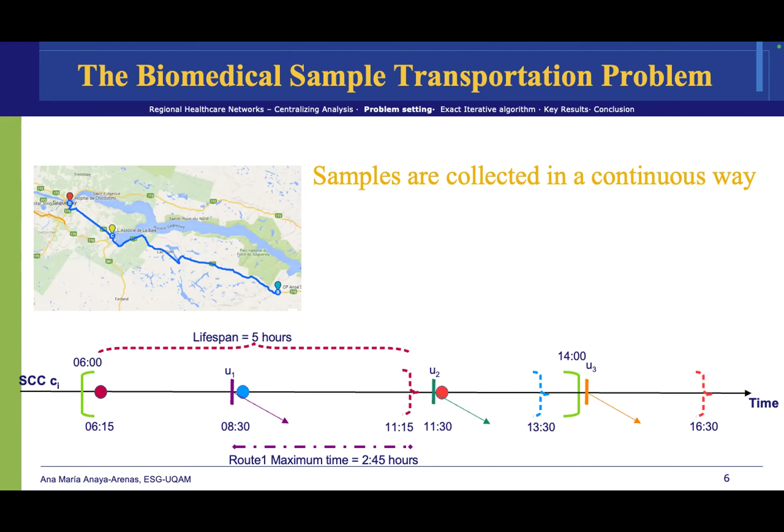So all these decisions are interconnected, and not only that - the pickup decisions and the routing decisions are even connected. This is the problem in reality.

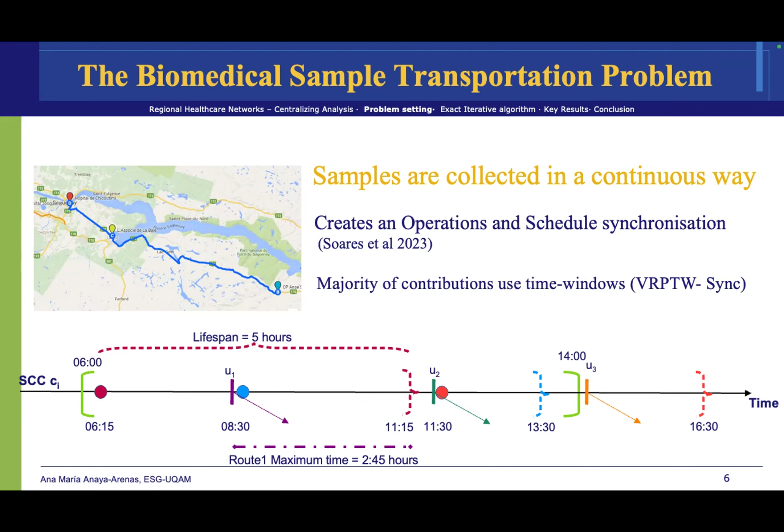What it creates is what we call an operation and schedule synchronization problem. According to Soares - Ursula Soares and our team did a very nice review, I think, on these problems and synchronizations - this classifies well into those types of interdependencies and synchronization issues. How it has usually been dealt with is through time windows, so actually problem settings are usually included, but I'll get to that later.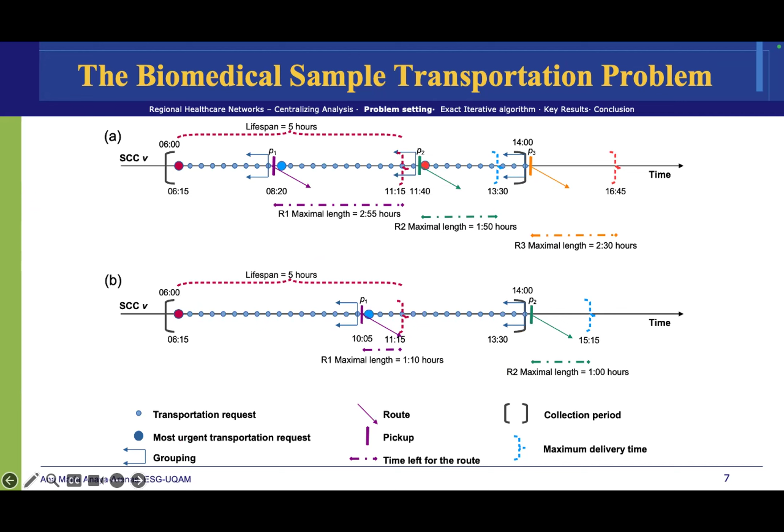So this is the kind of complicated problem, and what I showed you was for one SCC, but what you have, of course, is a network of SCCs. So different centers with different communities, you have different pickups required, you have a fixed lab. You will probably visit an SCC more than once in a day, as you saw. So they become very highly interdependent.

And then the question of the fixed number of pickups that you will do also became a challenge, and this is actually what we want to explore in this case. And the lifespan of the samples makes a time constraint not only in the visit of the center, but also in the routing decisions and how long you can actually drive. Other problems we have solved before, so in general, we have time restrictions like this one. Well, we need to make decisions at that point.

So the first approach that we actually do is saying, I will fix a maximum time and I will try to control this with, let's say, time windows. And this is actually our first approach. So we have one paper that explains this problem as a VRP with multiple time windows, independent time windows. So we have to do a time decomposition on our end.

The next thing that we could do, and we actually do this with the ministry, was guarantee what we call a service level. So you told me how many times I will visit. I will not visit you in the time window that you provided. I will respect some sort of maximum time between visits, giving some visit consistency. Or, and this is also recently published, I will guarantee this maximum time, and I will maybe try to tackle the complexity of the problem in a rolling horizon kind of heuristic.

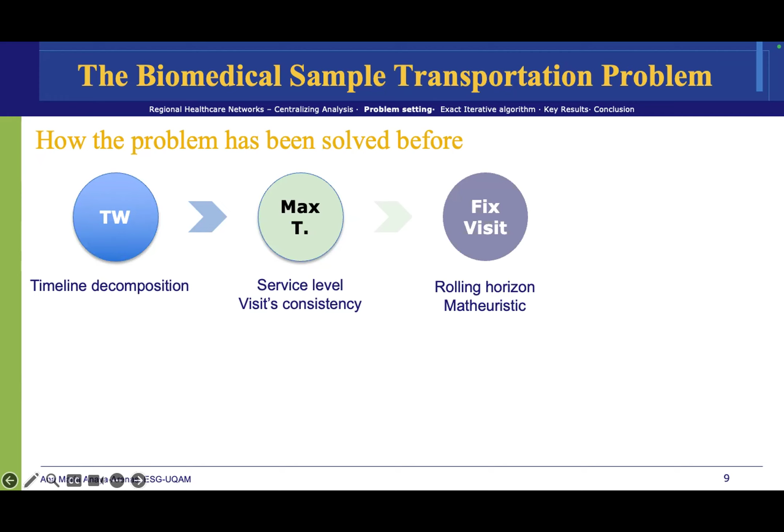And what we propose here now, because until now, all these problems, and it has usually been dealt with in the literature, not only by me, there are a few papers that have this quite specific problem too. They're usually defined as a classical arc formulation VRP with multiple and interdependent pickups. But we can start thinking of things that might be hard this way.

First, as in the example that we just saw, the idea of having a priori aggregation, of making a decision itself: how many pickups should I do? Where should I batch? How many batches should I put together? Because that can of course lead to suboptimal solutions in the broader sense. Our calculation of pickups might be wrong.

So actually, one of the first works related to this was done by the team in Austria, Professor Doerner and their team. And they actually proved with a simple heuristic, in a case like that, with post-experimental analysis, that in some cases, doing more pickups than the minimum is actually better for the plan. So what we're looking at here is a new approach, and it actually solved it in an exact way.

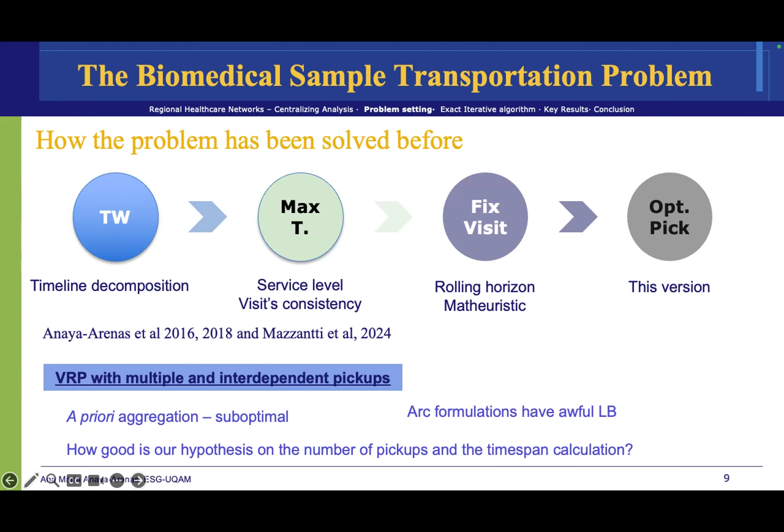Because this is another main challenge of this problem. Our lower bound is very, very bad. So those formulations become quite hard to solve, especially when you add the complexity of interdependency and synchronization. So what we did is propose a different approach. We said I will not model this problem as a VRP, but as a time-expanded network. So I will multiply my network, and of course the physical nodes will be multiplied by time periods in a time-space network.

And the beauty of that was that we were able to then deal with the synchronization and the dynamicity of the problem in an exact way, and also provide a higher level of detail to manage. So instead of having a tool where we take how many pickups you actually need, let's see if we can actually do something that's better.

And then test different granularities and decisions, because, and you saw it in the beginning, this of course is work that I've done with collaborators. This is actually one of the first projects that my PhD student started working on, Daniel Ocampo. And it's a collaboration with Claudio, who is now here at Concordia. And when he was talking about this, I was like, this cannot be better. You're multiplying the network, this is too much. And I have to say that he was right. So we actually proved that it was good, and I will share some results here.

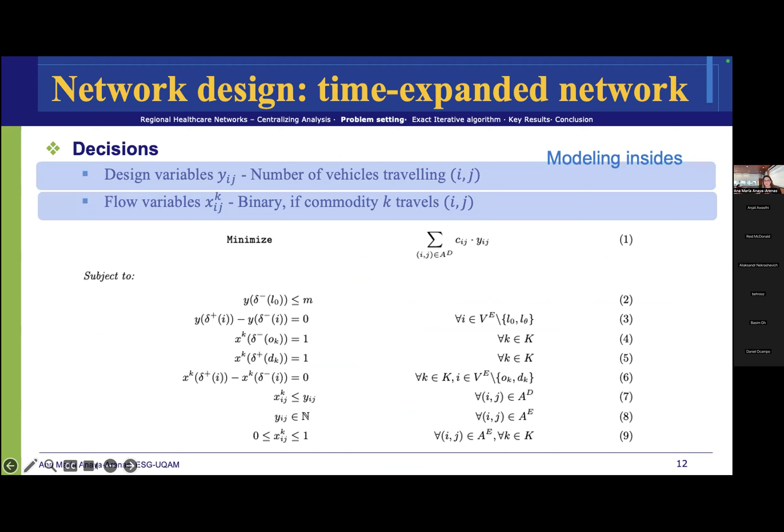So we introduced what we call a commodity grouping, which is trying to find a good cluster of commodities to reduce the time. The group feasibility is verified and separated if necessary. So we start by grouping into just one commodity per SCC. But of course, this is not necessarily feasible. So you make sure that you were able to deliver the commodity inside the time frame, or deliver before it perishes. So you create as many initial groups as possible, and with it you start your lower bound.

This iteration, a new model is created with the realization of this problem. We validate the current grouping in the lower bound, if it is feasible, and if we have arc extensions that need to be performed. If it is feasible, tackle again, but if not, we go to the second stage. And the second stage will try two things.

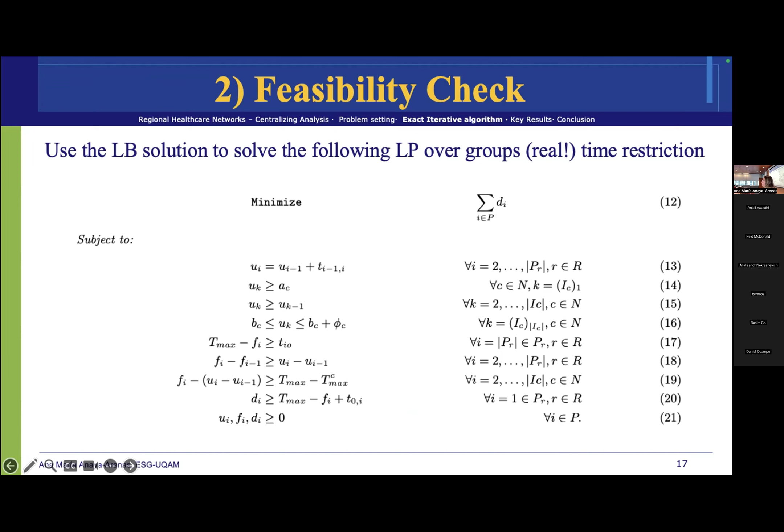So what we want with this is to see if the solution actually makes sense, but we need to find better times, and this model will let us. If we do, great, we found a feasible solution from the lower bound. If not, we pass to the next step, which is actually creating a new upper bound.

For the upper bound, I'm going a little bit faster because I don't want to get into detail and have more time for discussions. But there are two ways of creating an upper bound. We propose first a randomized construction heuristic. So we create groups that make sense. We pass this creating independent routes for every group, and then we calculate time slacks for every route possible to see if we can merge routes together.

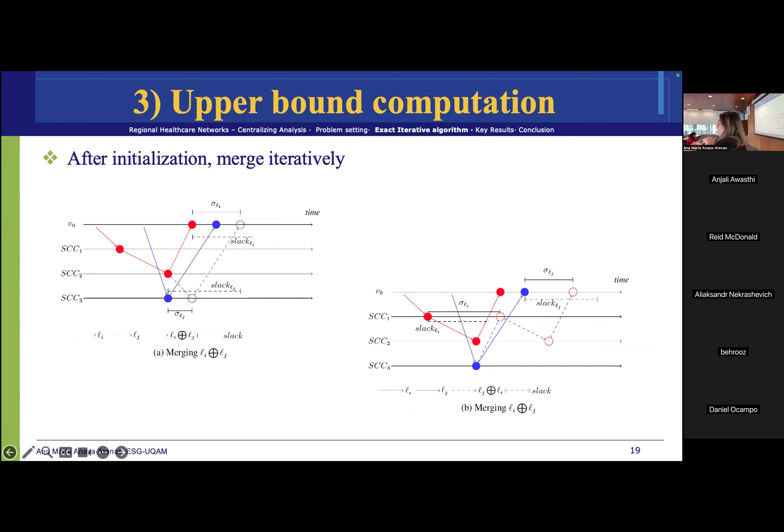So first you calculate your savings, you make sure that you test feasibility and things that make sense, and so on and so forth. But the good thing here is that we're able to find a solution for every problem every time. We'll skip the details of that. And then this will give you a solution, and this is one of the heuristics that we tested, but we propose another one, and this one looks to take use of the information that your iteration of your lower bound gives you.

So if the algorithm is telling you a solution, what we propose is building a solution heuristic which takes the auxiliary network from the lower bound model, but with a much coarser target representation, so it's easier to solve, and exploits this information on the groups, travel time and time restrictions, adding as many nodes as necessary to make the paths that the lower bound gives us feasible. What I'm saying by that is that if your lower bound model gives you a solution that goes back in time, you know that you cannot do that, so you create as many nodes as needed to make sure that you arrive at a good time.

This auxiliary network is much less crowded than the full extended network, so it's faster, but the downside is that as the lower bound model becomes bigger, this one will become even bigger. So it may not lead us to solutions. But in some cases, it was able to either prove feasibility, which is a great case if the solution at the end is possible, or just give us a chance to have a new iteration.

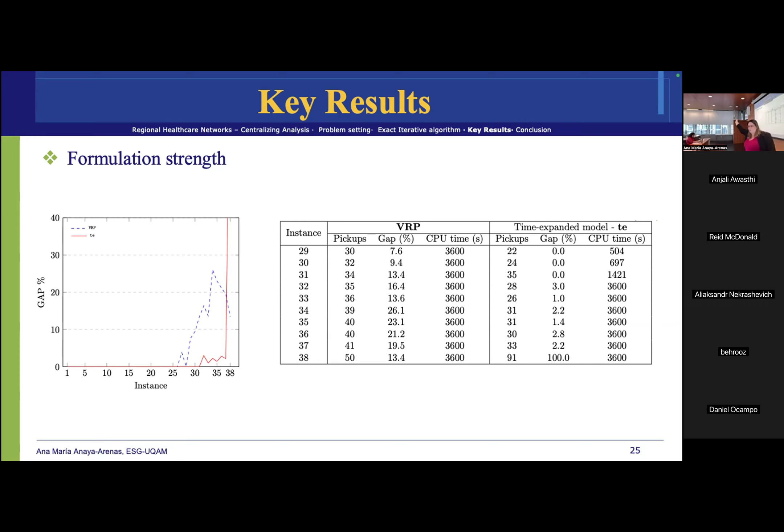Their formulation starts having problems around instances 26 to 29. In our case, we're able to solve almost all of them to optimality, and in the ones that we're not able to solve to optimality directly, we have a very minor gap, except instance 38. So that worked well.

The next question is, was it interesting to make this type of detailed model of a decision that they are already telling us they want cut? Why do we bother? Well, here you have the number of pickups. Again, red is this method. The VRP will perform all the pickups that are requested; it's part of the modeling. In our case, our time expanded network is able to find fewer pickups than were expected and requested. And of course, as they do fewer pickups, they're able to have a better total distance traveled.

And next, that's the algorithm. So what we propose, we tested it over the 38 instances in all sorts of different configurations. We reduced it, and we're showing you here just what makes more sense in terms of detail. So we tested with a delta T, that means granularity, of 1 minute and 5 minutes. I'm not even going to the 15 minutes here. And the DK, which is the granularity of commodities generation, of 15 minutes, 30 minutes, or 1 hour. So a sample is generated in 15, 30, or 60 minutes.

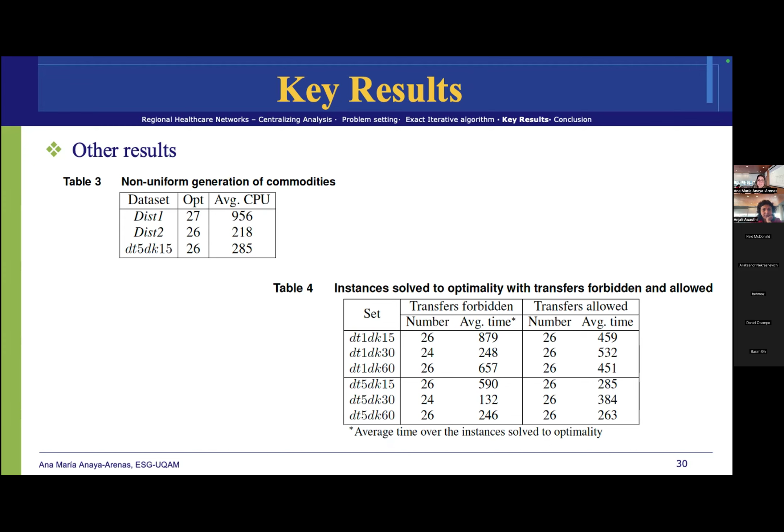All right. The key thing, or a big part of my message, is that this came from a very real case that people are still solving. I was there this week, and I still saw the lab, and then we can discuss a little bit more about that experience.

But what I'm trying to give you is that healthcare and public health problems are interesting and very challenging. They can give you a nice motivation for different types of collaboration. So I've worked on this problem for a while now, with different types of people, with different ways to do it and different approaches. But I think they're quite interesting. For me, more exciting. The formulation we provided became quite interesting. We looked at things from different angles.

When we submitted this, the main comment that came back was, wait, you're saying that you're solving a vehicle problem, and you're modeling it as a service network design. That makes no sense. And of course, it's not the reviewers' fault. It was our fault that we didn't explain properly why we wanted to do this. The second time we submitted it, this was not highlighted, so I think we explained it better. But my point here is that tackling problems in ways that don't seem natural can actually make sense and be useful. And our algorithm is able to solve to optimality 26 of 38 instances, with a number of periods and commodities much higher than other DDD algorithms.